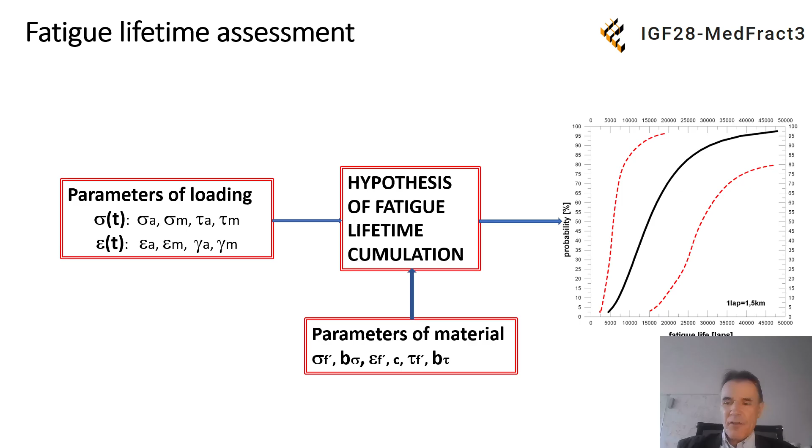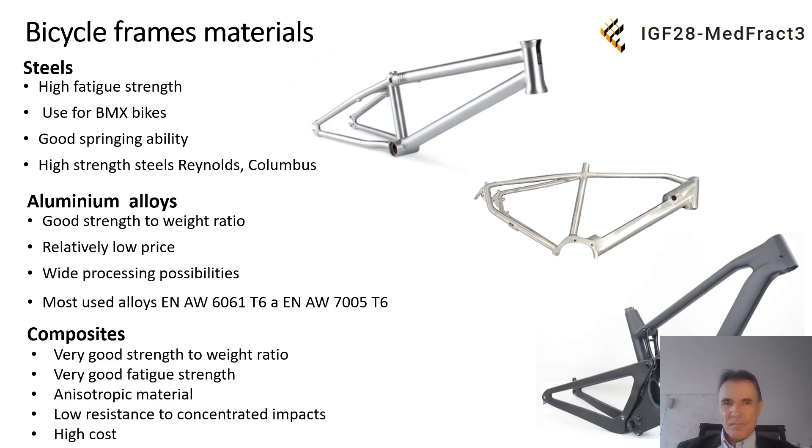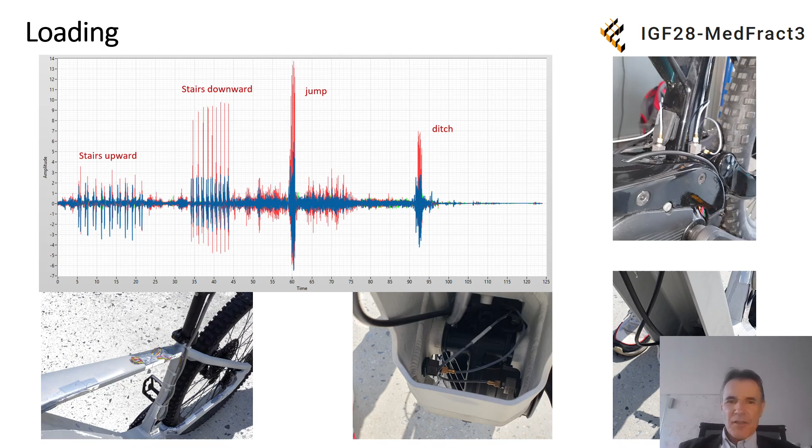Here's a short video from this measurement of the loading process, the dynamic parameters of operation, in front of our faculty.

Based on this measured data, after some processing such as filtering, it was possible to define the dynamic factors in these key operational states: ditch, stairs, and jump. In this table are documented the results as dynamic coefficients in the vertical, lateral, and longitudinal direction for these 3 operational states. All measurements were made at 24 psi tire pressure, which is recommended by the producer.

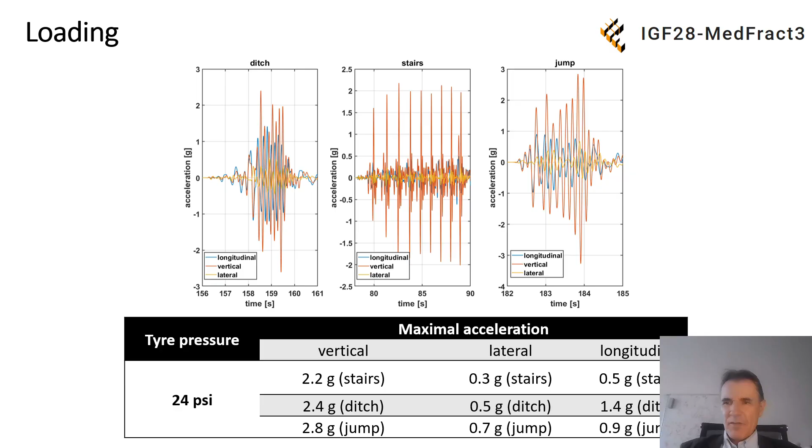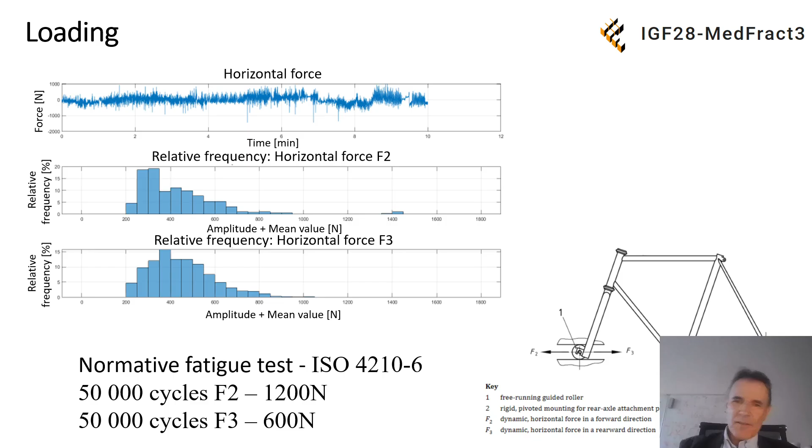It's also possible to compare this measured data with the standards, which prescribe how the frame should be loaded on a stand in laboratories. This is not so important for this presentation, but it's possible to compare.

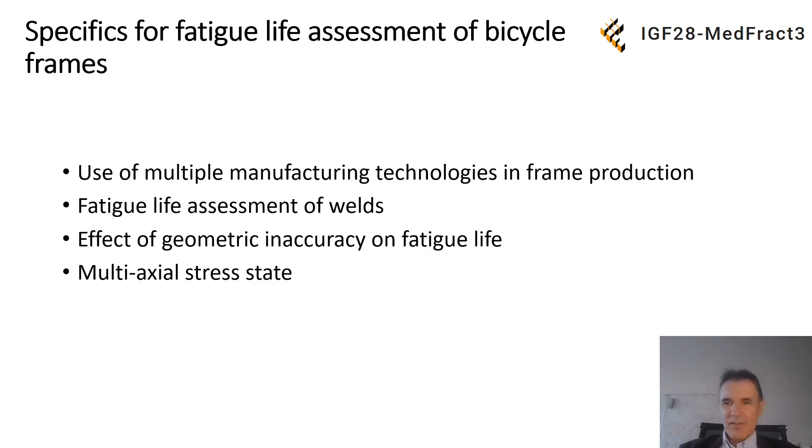Important is to define the specifics for fatigue life assessment once it's clear what the operation is. I mention all 4 and then describe each in depth. The first specific is the multiple technologies present in frame production, which lead to different material properties. The second specific is the fatigue life assessment of welds. Welds are very complicated for fatigue life assessment, and these specifics are present in frames from aluminum alloys or steels. Then there is the effect of geometric inaccuracy on fatigue life. And last is the multiaxial stress state, which can be considered in the assessment procedure.

Technological processes. From this table it's possible to see the different tensile properties caused by different technological processes in producing these bicycle frames. For example, liquid die casting, forging, low pressure casting, die casting, or hydroforming are typical processes for aluminum alloys, and all these procedures lead to different tensile properties such as yield stress and ultimate stress, and clearly also to rather different fatigue properties of the material.

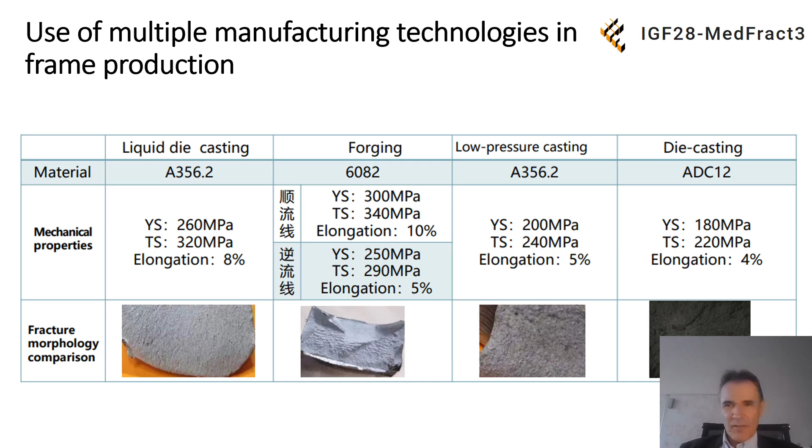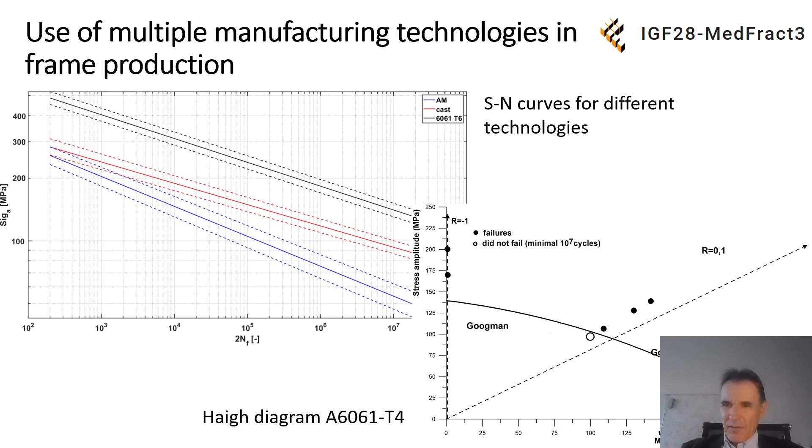Here's the problem with weld joints, the second problem in these technologies. A weld joint is a very complicated part for fatigue life assessment. A few approaches exist, and they are also included in standards. Another problem is that welding on bicycle frames is more complicated due to the non-constant wall thickness of these tubes.

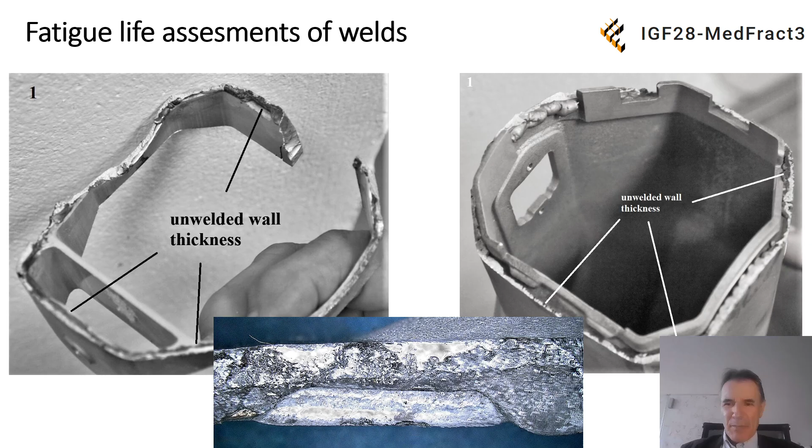These e-bikes have modification of tube thickness around the circumference, and in this picture it's very visible that some parts are well welded and some parts are insufficiently welded. This is an additional problem for assessment of fatigue lifetime, because it's very complicated to determine the appropriate fatigue properties of the joint material.

We tried to test this weld joint. This is the weld joint directly from the producer. This is reality, and this weld was relatively simple for us, so testing to obtain the SN curve was relatively simple. This is the circle with constant tube thickness.

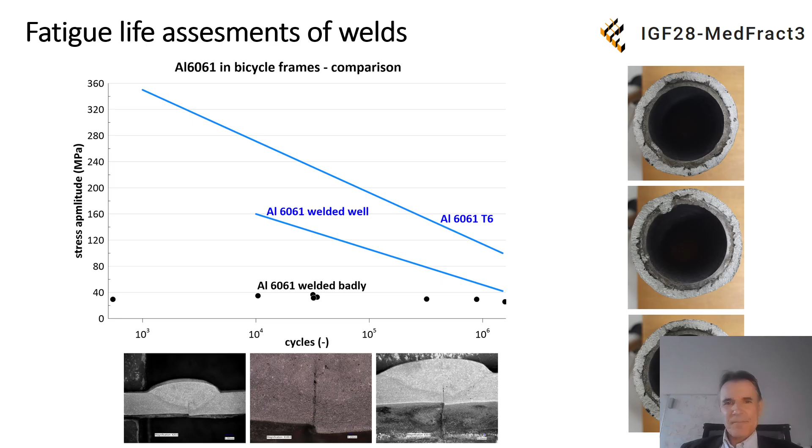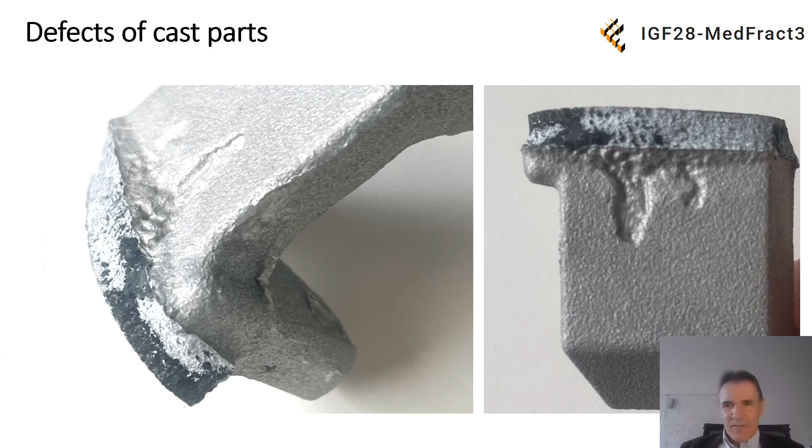Here is another technological process. This is die casting. Also, this process can lead to problems such as porosity, as bubbles. These bubbles decrease the cross section, and also these are the points in which the fatigue crack can start, as is documented also on this picture.

Another problem, another specific of these bicycle frames which influences the fatigue lifetime, is the geometric inaccuracy, which at first view is not so visible by eye, but it's possible to see when you measure it relatively precisely. It's possible to see on these pictures that, for example, non-parallelism between the head tube axis and saddle tube axis, as documented on the right picture on the top, can lead to additional stresses in the frame, which are not considered when the geometry is perfect.

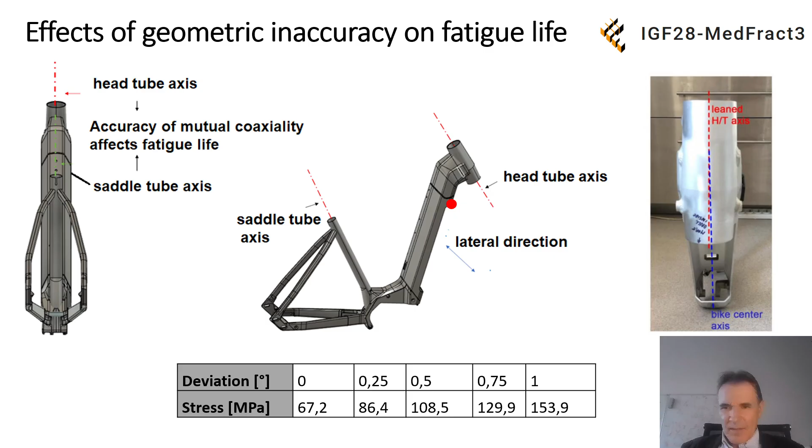And when it's not perfect, in the simulation it's possible to obtain the results documented in this table down. When deviation is zero, the geometry is perfect. Maximum stress in the most loaded point on this frame is 67 megapascal. When this non-parallelism is 1 degree between these two axes, the maximum stress in the same cross-section increases 2 times, 154 megapascal. But this is additional loading which is not considered in the standards assessment. But the reality is that this inaccuracy is real, is present in the real frame, and it is necessary to consider these specifics in the fatigue lifetime assessment.

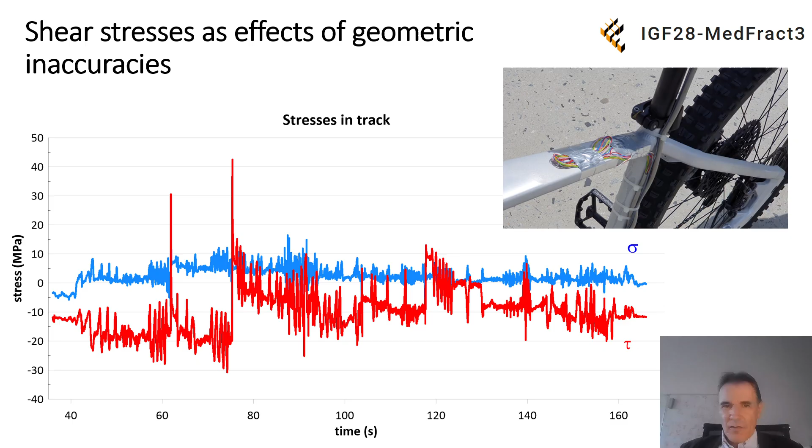These are the stresses in this point, but this tube, this part, is the part which joins the seat tube and head tube, and loading here is relatively stable without a big gradient. So these are very valuable results of the shear stresses. In standards these shear stresses are not present, because standards do not consider geometrical inaccuracies. Reality is with these red stresses, and they are comparable with these normal stresses from bending when we see these values.

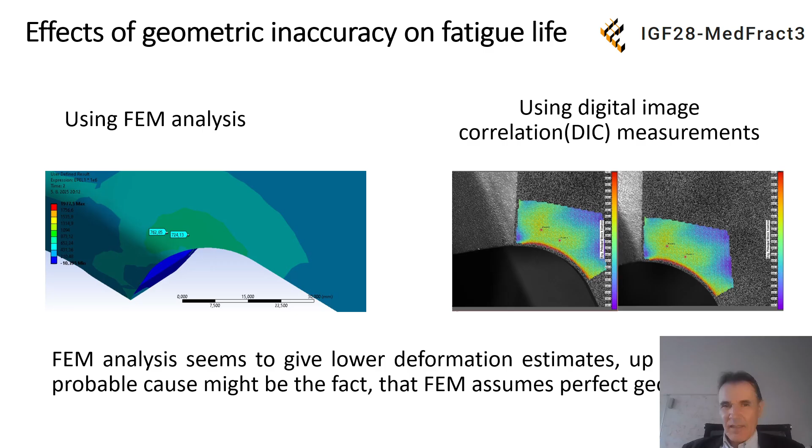When we confront these stresses from the simulation with ideal geometry with stresses from measurement on the real geometry, here's the measurement using DIC, digital image correlation, and here are the results from the finite element method. This is the ideal geometry, here's the real geometry. These differences are also possible to see. It is not possible to absolutely omit them, and this difference between real stresses and ideal simulated stresses is also necessary to add in the assessment of fatigue lifetime, and this is also one of the specifics of not only bicycle frames.

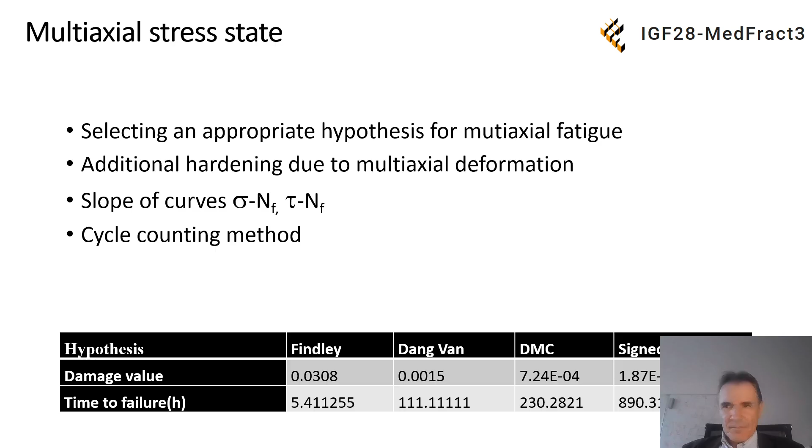At the end, it's possible to conclude these specifics of assessment of fatigue lifetime in bicycle frames. The first is the multiple manufacturing technologies which are present in frame production, and these different manufacturing technologies lead to different cyclic material properties. This is the fact, and it's necessary to consider it. The second problem and second specific are the welds. Not only welds in general, but the specific kind of welds present on bicycle frames due to the change of thickness around the cross section. These welding parameters are very complicated to adjust appropriately, and this leads these welds to a lower SN curve than we expect in weld joining.

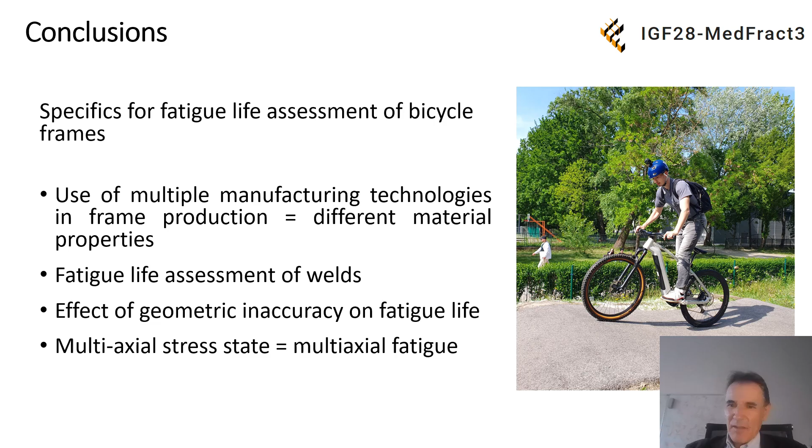The next specific is the effect of geometric inaccuracy on the fatigue life, which creates or induces additional stresses, additional loading. In the majority of cases, this is additional torsion. This additional torsion creates additional shear stresses, which are necessary to consider also in the process of assessment of fatigue lifetime. This stress is possible to measure directly in operation or directly on the bicycle frame on the stand. And this additional torsion, additional shear stresses lead to another specific, the last, the multiaxial stress state, which has many problems, is not standardized to this time, with the selection of an appropriate hypothesis for multiaxial fatigue and the right cycle counting method. These are all the specifics which are present in bicycle frames.